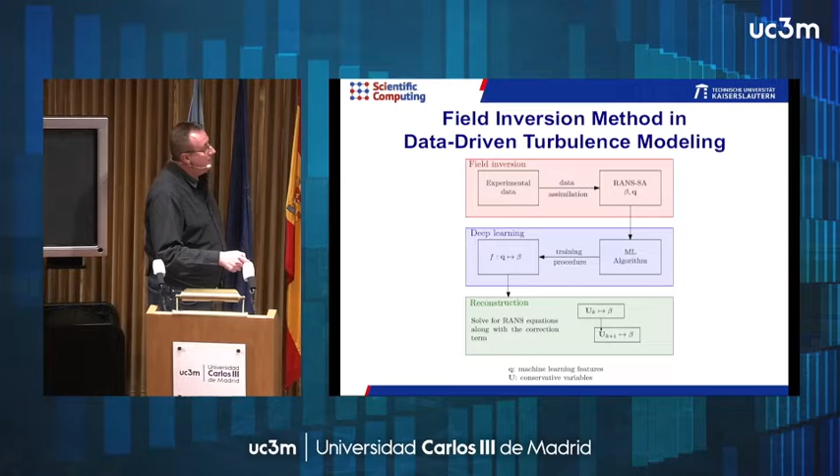you can do reconstruction. So that means you just start a simulation. Then out of the first simulation step, you get out the q. Then you feed the q into your trained ML model that spits out an update in your beta. You put this in the transport equation, do the next step, and so on. And hopefully the result, trained by the data coming via the data assimilation in your machine learning model, gives you better results in the simulation. Okay, so that's the chain.

Whatever here is in red, these are tools of open source communities like SU2. It's a multi-physics package developed by on the order of 200 groups worldwide with roughly 1 million users, and it becomes more and more popular, especially in the United States. My group belongs to the core team of about 7 teams who do the overall framework, and I augmented it with 3 tools developed in my group.

The code differentiation package is an algorithmic differentiation package, CodiPack, and the parallelization packages for algorithmic differentiation set up the adjoints automatically, also in a multidisciplinary sense. So that means you have a design suite here, an open source design suite, which is also easy to maintain by the machinery we provide with our AD tools.

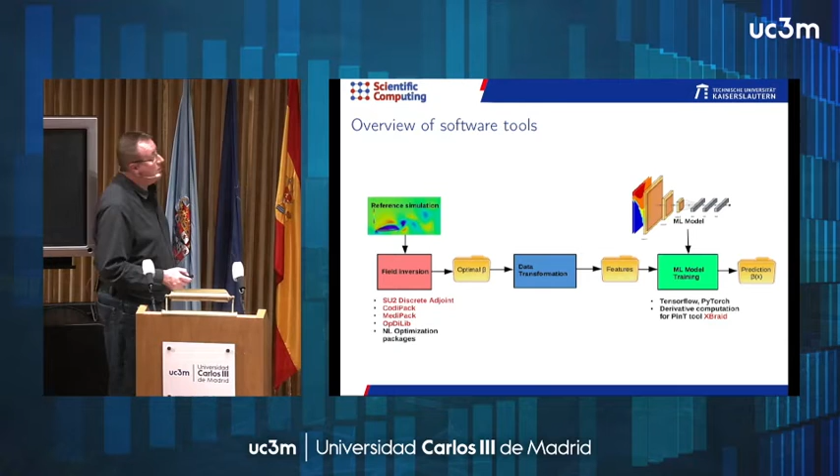And then we do the field inversion. That's a standard optimization in our point of view. Then we hand over these beta and we do the learning process from the feature to the beta. And if it is trained, it is just used to spit out the forecast for the beta. And you will see there is also a link to other standard tools in the machine learning world, plus a specialty from the parallel in time community. There is a tool, XBraid.

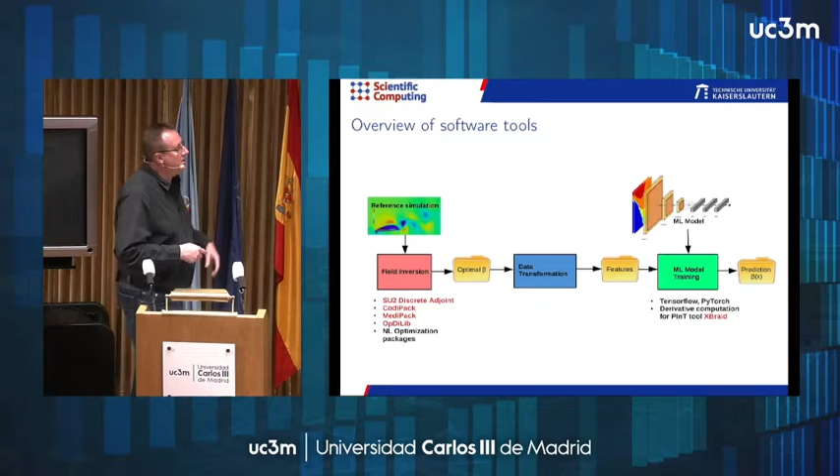I will show you some analogies to simultaneous analysis and design in shape optimization for aerospace. And then in the second part we take this view on the black box machine learning model for residual deep neural networks, and identify it as being nothing but an optimization with an ODE problem. And then we make use of these one-shot methods, all-in-one methods, and the tool XBraid. But we do this now step by step.

So these are again the tools here: SU2, CodiPack, MediPack, OpDiLib. Our algorithmic differentiation tool is well tuned for high performance computing applications. So we really apply this here on this open source package. Everything you will see today has been done with SU2. However, we apply this also for really industrial solvers or solvers provided by the German Aerospace Center. In that case, in Cologne, the DLR TRACE code is a turbomachinery code.

It's really the production code of MTU Aero Engines for the design of turbines, and that we have also differentiated with my package CodiPack. So it is really capable to differentiate automatically through MPI and OpenMP directives, and that gives you the potential to scale on many-core architectures where you blend MPI, OpenMP, and accelerator parallelization environments.

Okay, so we start with the data assimilation first. This is a standard setting. We have an objective function for the optimization. The cost function is J, which we want to minimize. Phi is the parameter; imagine this beta field, for example, highly dimensional, and a constraint is to be fulfilled, R equals 0. So this could be our Navier-Stokes equation, for example.

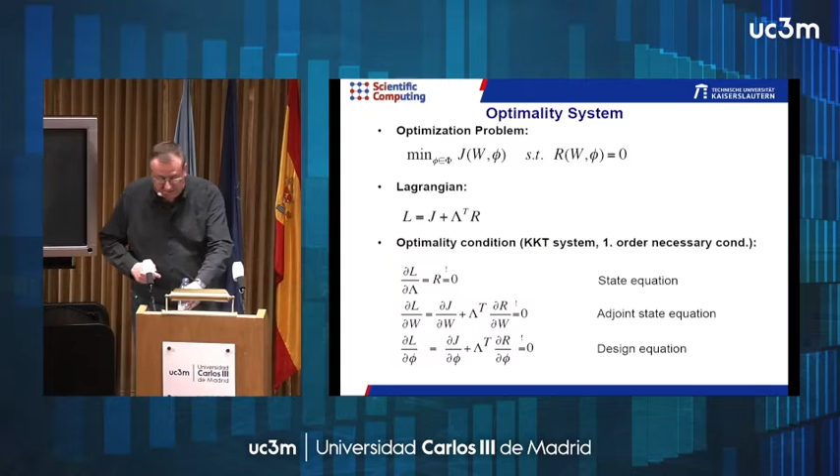A standard way to set up the optimality conditions is you define a Lagrangian where you augment your scalar cost function by introducing a multiplier lambda multiplied by your state constraint R, which is 0. So this gives you a scalar 0. Whenever this PDE constraint is fulfilled, L equals J. And that's the Lagrange formalism. The optimality criterion is nothing but a first order necessary condition for optimality, for stationary points. That means this function L depends on J and R, therefore on W and phi, and in addition on the Lagrangian multiplier lambda.

The necessary condition is that the total gradients, so the partials with respect to lambda, W and phi, vanish. The derivative with respect to lambda means R has to be 0, so our constraint has to be fulfilled. If we differentiate with respect to the state variable, our flow state, we get the partial of J with respect to W plus lambda transposed dR/dW, which is a matrix, because a vector differentiated by a vector gives a matrix, equals 0. This is the adjoint state equation. It looks so innocent; it's just a linear equation. If you transpose it, it's dR/dW transpose times lambda equals minus dJ/dW.

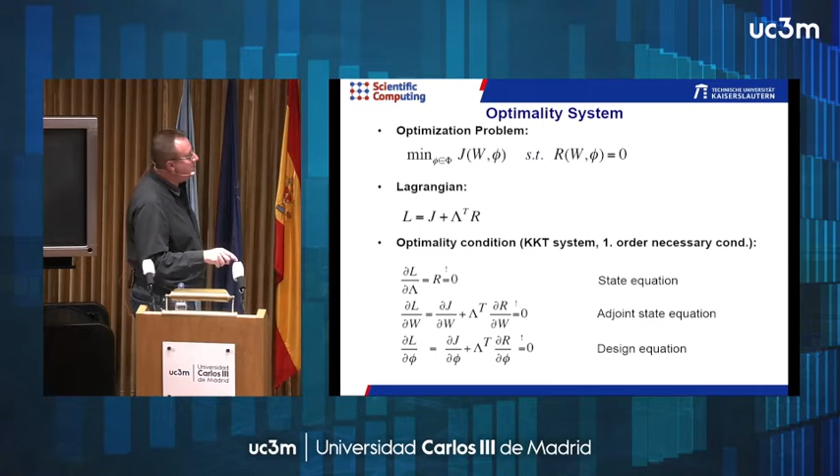So it's the gradient. And the cool thing is, for the cost of one flow simulation and one adjoint simulation, which pops out the lambda, you get by this design equation in one stroke many inputs in your gradient, the components of your gradient, so the total derivative of j with respect to phi. So that's the standard way.

And what you see here, that looks like a finite dimensional scalar product in L2, Euclidean scalar product. Then these are the optimality conditions, and you could even derive these optimality conditions by means of continuous equations. Then it's this continuous adjoint method. So that's the adjoint methodology.

However, that's not really the truth, because the optimization problem usually doesn't live in this space L2. It's more complicated in continuous space. You have to hope that you have so-called Hilbert space settings. So that means that the norm in this space can be expressed by a scalar product. So scalar product, the root of it is the norm. It's hard to know if we have Hilbert space setting.

Usually the nature of the simulation here lives in some Sobolev type space, and not each Sobolev space has really Hilbert space setting and so on. So you can do a trick, you derive everything in L2, and later on you translate the derivative information into a Hilbert space setting, which is close to the real world problem.

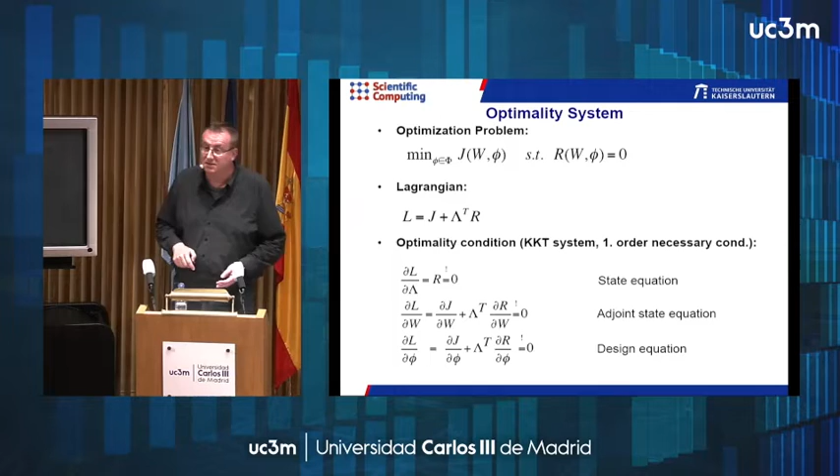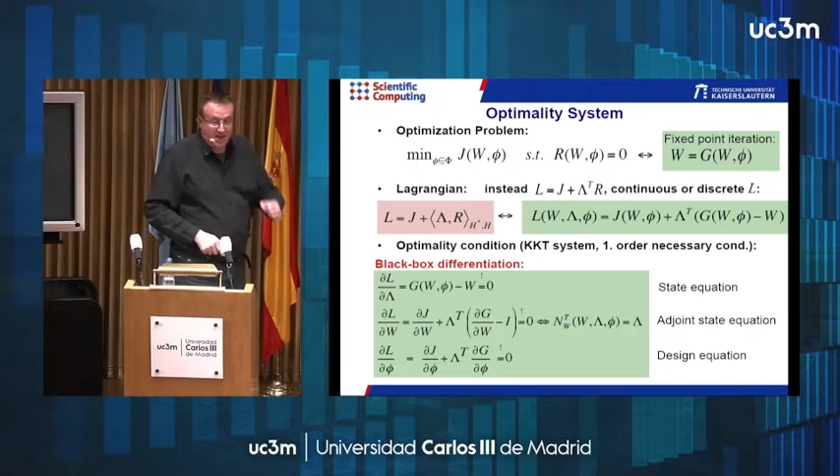So that means if I derive optimality conditions that way, I inherit perfectly the contractivity. That means whenever the forward scheme was contractive, the adjoint scheme needs to be contractive. When you now ask me why the hell the people don't do it that way, because it's numerically stable, it guarantees convergence, it doesn't amplify errors and so on, you shouldn't do anything else.

So the truth is, it's hard to get this adjoint iterator, because to get the dg by dw, I apply algorithmic differentiation. The funny thing is, I apply algorithmic differentiation in reverse mode, so I use an adjoint operation to generate a driver program to compute the real adjoint information. And that means I have to differentiate through the whole solver and not only the flux residual routines. So that costs you something, but in my case, it's done by my automatic differentiation tool. I don't have to derive everything. So that's the first message.

And when you have this setting that is so stable and avoiding additional errors, it has the potential to be augmented to so-called one-shot methods. That comes in a minute. Okay.

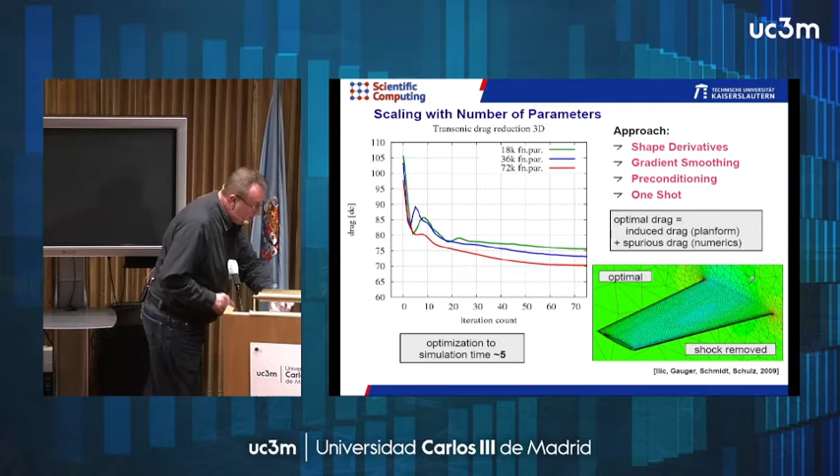You see here an ONERA M6 wing for different numbers of surface points. Here each surface point was a design variable. On the coarsest mesh it's 18,000 degrees of freedom. You see if you double it, you have the same convergence behavior. Of course, the spurious drag, it's a drag minimization problem here for inviscid flow, reduces because you resolve physics better.

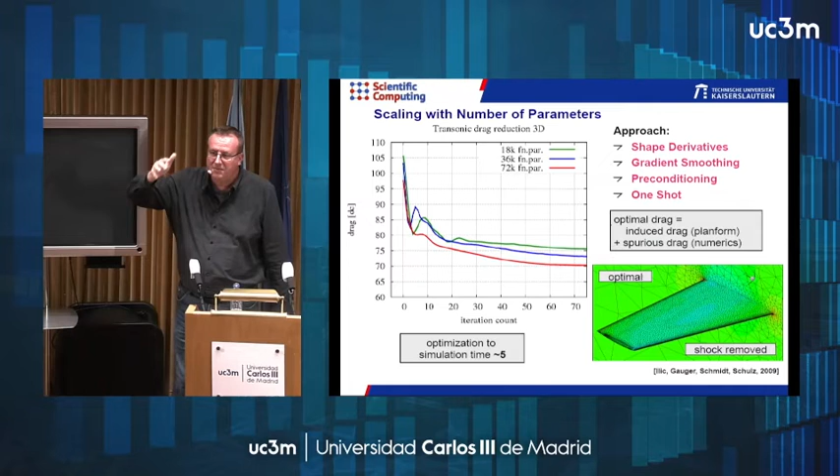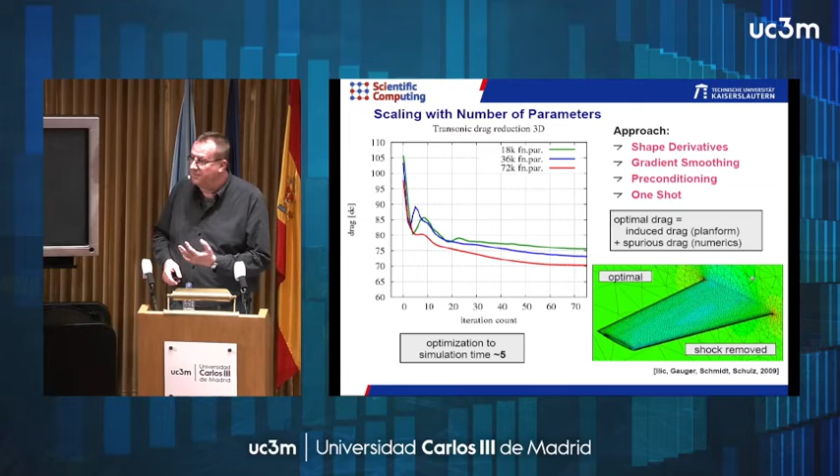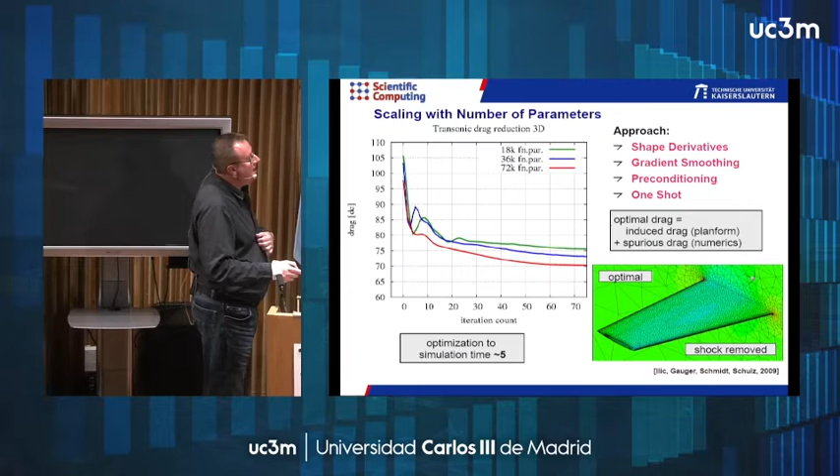But the convergence speed of an optimization compared to just a simulation is always a factor 5. So for the costs of 5 simulations, you are already in the optimum. You solve your optimality problem in one stroke simultaneously. And then the idea is it's mesh independent. That's no wonder, because it's close to Newton's method, and Newton's method is mesh independent, as one knows from numerics. Then the idea is we start on a coarse level, and when we are in the optimum, we transfer that solution to the fine level, and then we continue.

And if we do this, we have optimality for the coarse level, do an adaptation, transfer on the fine, and continue. We have a two-level, multi-level approach. It's a factor 2 in computational time. Yeah, so for 2 computations, on the fine mesh level, you are already in the optimum.

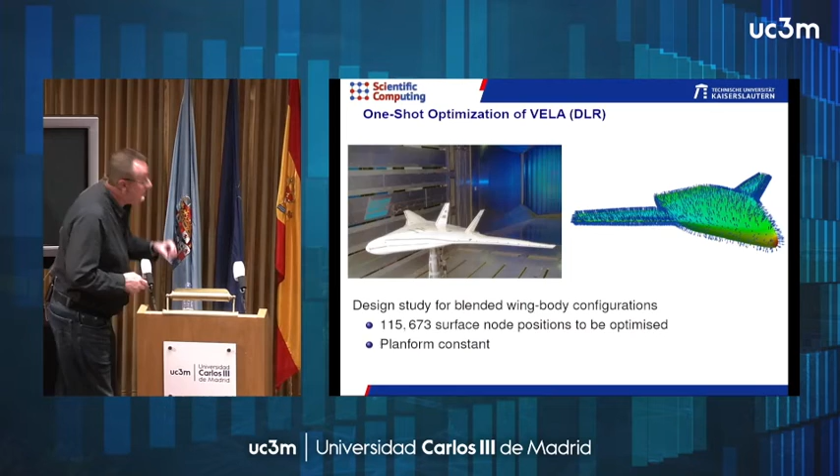Okay, and then the idea was, couldn't we now combine optimality and adaptivity? And we did also serious math investigations that it is really mesh independent and so on. Then we have a very efficient optimization scheme, and we applied it on the very efficient large aircraft configuration from DLR. You see here we have 115,000 shape variables, and we apply it for drag reduction by constant lift.

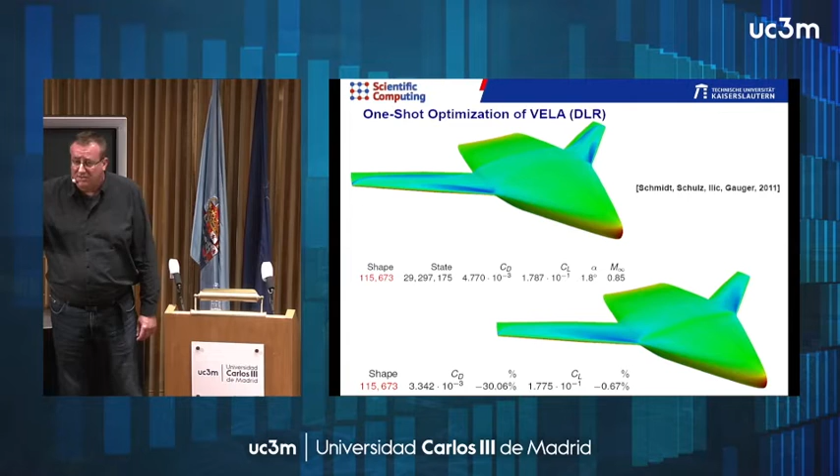You see lift is nicely kept, and the drag is reduced because we could reduce strongly the shock. And by the way, it's very smooth, doesn't violate also the parameterization, is super local. It's the best resolution you can do because the state resolution coincides with the design resolution and a lot of nice properties. That is the fact because it's a Newton's method and it's not yielding in stupid bumps.

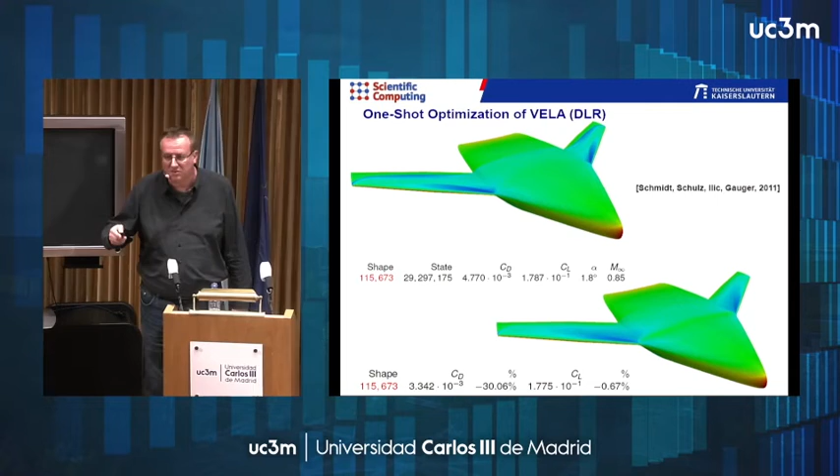And also it's close to smooth gradient approaches like Sobolev smooth stuff. But I also have to skip this thing. And now, what the hell has this to do with machine learning? And now comes the joke.

What we have used here in hardcore shape design, so optimization with PDE, but after the spatial discretization, it's just an ODE system in time or pseudo-time. We can make use also in standard machine learning black box applications. And you will understand this now immediately because you learned this now together with me in the aerospace context. In image recognition, it turned out it is very difficult to learn the identity.